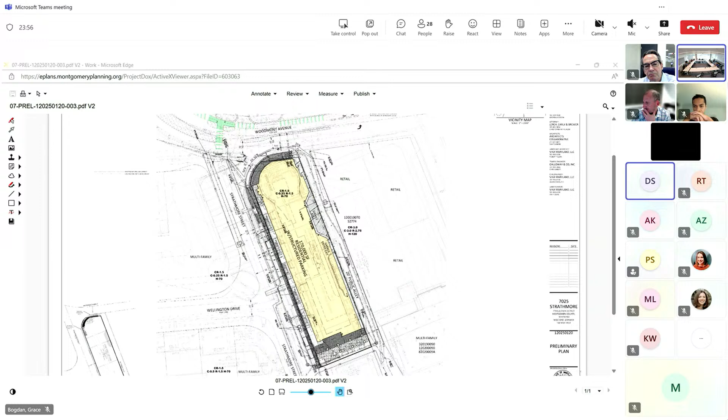So that is one of the reasons why we wanted to have a curb bump out. We're referring to it as a drop off, but it's really nothing other than a striped area. The striping is not going to work, it's not going to pass traffic. Please allow me to finish - it has been a comment in the sketch plan. I know why you're doing that stripe off for the drop off, and it is not going to fly. You can show it, but I can tell you right now you're going to run into permit issues, and I will have a condition in my DOT letter to bump that out. So you can keep showing it, but it is not going to pass traffic.

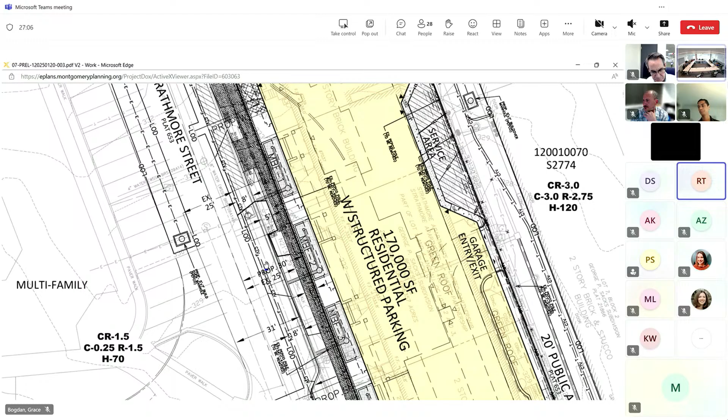Understood - if we can get the design criteria for where the intersection is, we can do that for you. I was also going to add that the intersection of Strathmore and Woodmont is going to change because of the excessive radius we currently have, which is causing safety issues. So we could incorporate that design along with the changes we're proposing for the intersection.

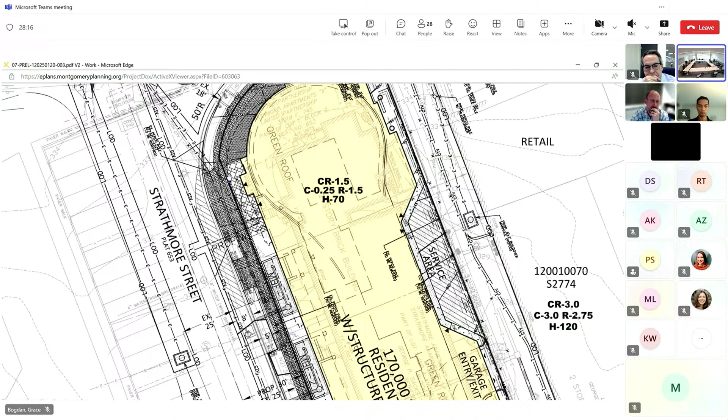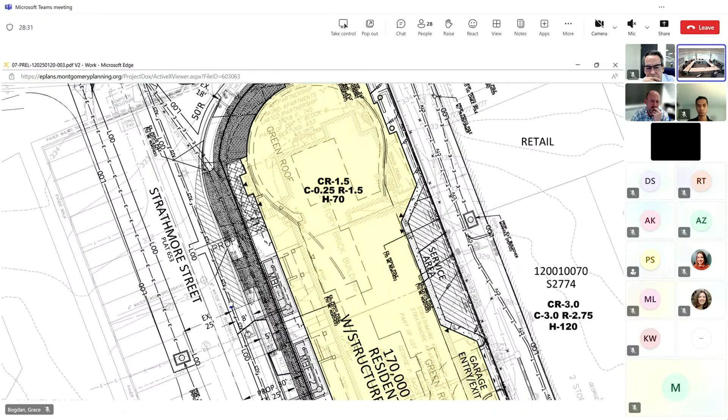On a related topic, when it comes to accessibility, the designed ADA parking is not properly dimensioned. With the changing design of Strathmore and Woodmont, we have to ensure all curb ramps are PROWAG and ADA compliant. I included the sections for design and the specific language from our Montgomery County accessibility guidelines - so if there's a ground-up redesign of that whole pedestrianized area, please follow through on it, ensuring proper setback for the existing parking, mention ADA access accurately per PROWAG, and include those additional pedestrianized upgrades consistent with PROWAG.

Okay, I'm pretty sure we followed that, but we'll include a detailed blow-up of that area so you can see it better. In that same area shown on the screen, the dashed portion is CAD we got from DOT for that whole Woodmont improvement you were talking about, Grace.

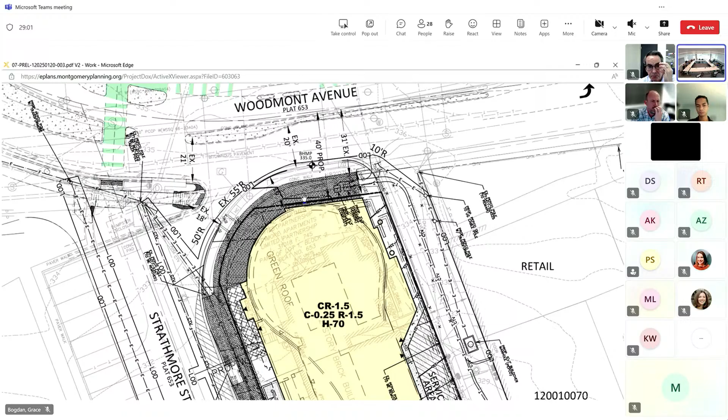I know there's been some discussion in the comments about making that lane 20 feet wide for Marie's access. I guess is the island in Woodmont mountable for her to cross over if she's coming from 355? I believe it is - it's mountable at the alley.

There's also a comment to tighten that radius - that 55-foot label - tighten that radius as well. I think that's part of the meeting we talked about at the beginning; we need a follow-up meeting to hash it all out. Because obviously those dumpsters and the inlet stuff we tried to avoid could potentially still be issues.

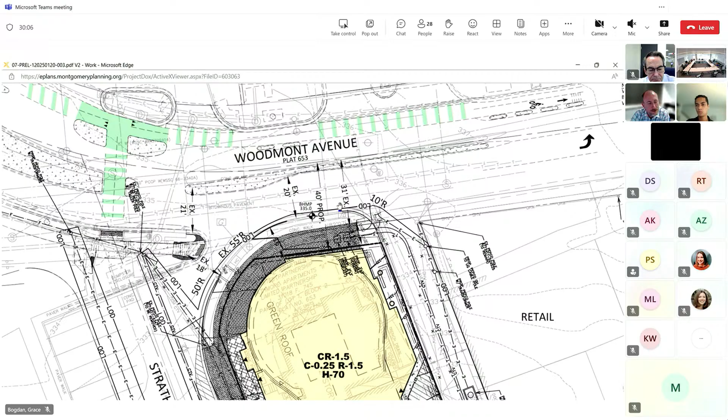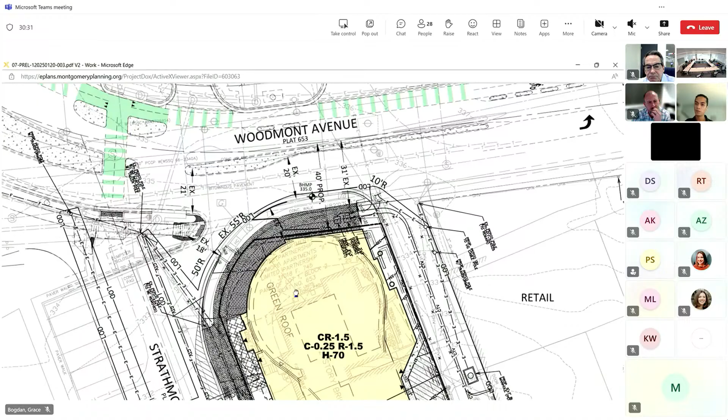So there's a comment on the double trees along Woodmont landscape. Yeah, that's correct - the requirement within Bethesda streetscape is that it needs to be a 10-foot sidewalk on Woodmont. Both Strathmore and Woodmont are considered green corridors. Therefore, you need to provide the maximum width for sidewalk and two rows of trees.

It seems like you're trying to address that on Strathmore, but we don't see that on Woodmont. So please make sure that you add that. In case you're not able to address that on Woodmont, we might consider if you provide high volume for the trees, so you could use the better description that we have in the design guidelines.

Thank you for that email that you detailed for us, Ariel. That was great. And the other thing is, go ahead.

We will definitely need to have a conversation about that. The trees on Woodmont actually were pulled back in response to DAP comments, so we need to make sure that the response is coordinated with all of these pieces.

You have to provide some justification why you're not meeting that master plan recommendation, and how you're going to mitigate for it. And the other thing, there's a discrepancy between the 35% - I think some sheets say 33%, and in your statement you say something like 35. We need to see consistency in what the real figure is that you're providing.

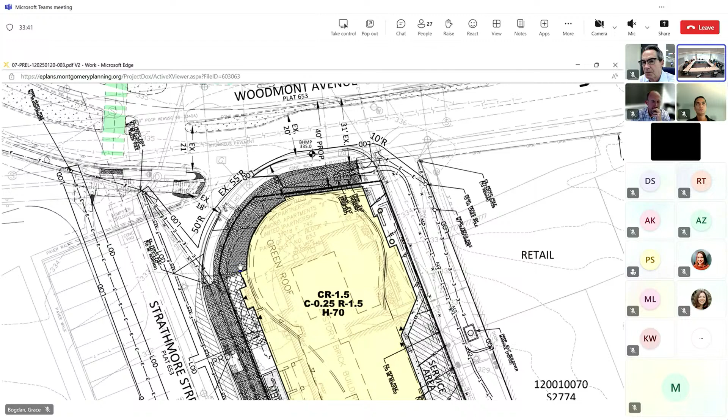Jason, I don't know if you want to bring up utilities, or John, the vaults. Hi, this is John Boyle, Richard Associates. I think the proposed vaults out in the public right of way is something we will coordinate with PEPCO, similar to 7000 Wisconsin Avenue, where you have the transformer vaults and other equipment out in public space maintained by PEPCO.

They need to be permitted by PEPCO too, John. Yes, that is correct - PEPCO will permit for all work in public space.

All right, anything else? I don't think so. I have one more thing, because Josh actually reminded me what my public benefit comment was - for the vegetated roof public benefits, if that area is being used for stormwater management, is it separate? They are separately measured. Thank you, we'll need an exhibit showing that. Okay, absolutely.

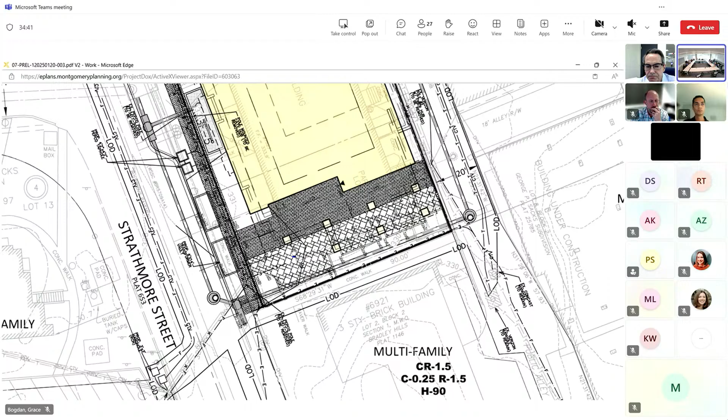Yeah, that was it. So we can talk schedule if you want. But first, for this follow-up meeting, it sounds like we need DPS and DOT. I don't know if Marie technically wants to be part of it. I'll check with her - I think as long as she's getting the 20 feet, she should be fine.

To talk about the bump out and the whole design really at the corner of Woodmont and Strathmore, and I'll give you some options. I think we have a dedicated time set up for next Tuesday, so we can see if that works for your schedule.

Okay, so for schedule, based on your acceptance date, you have a September 11th planning board date. So working back from that, your first resubmittal would be June 18th, with your last submittal being July 8th, and agency letters due July 28th.

Thank you. Thanks very much, guys. Thanks.